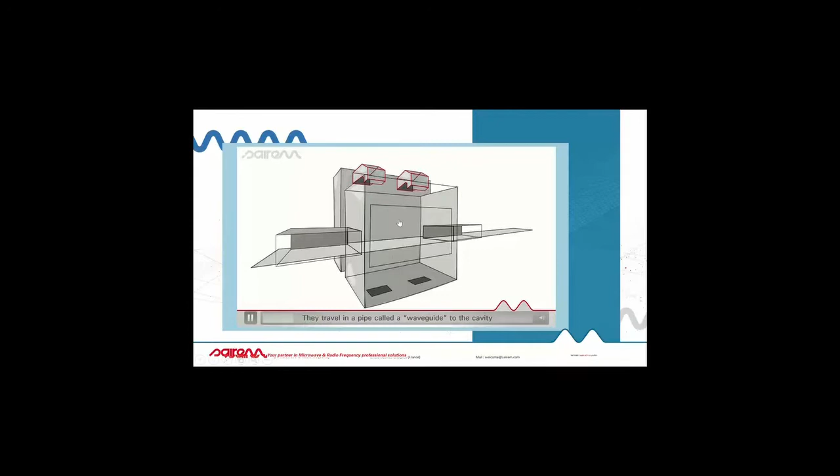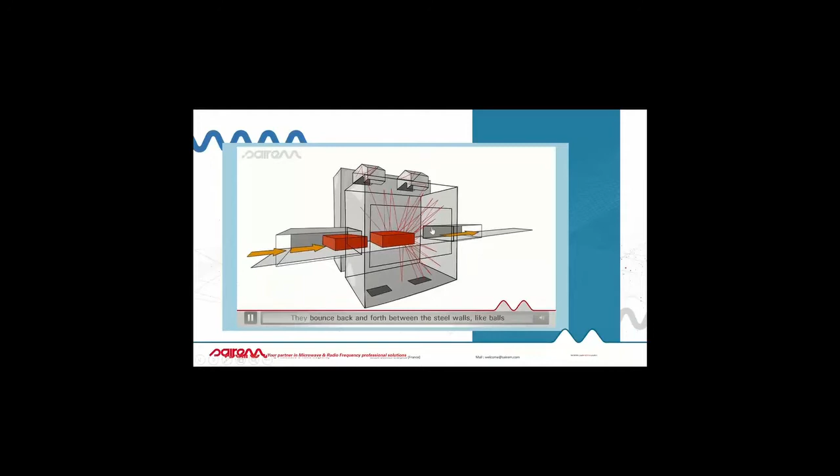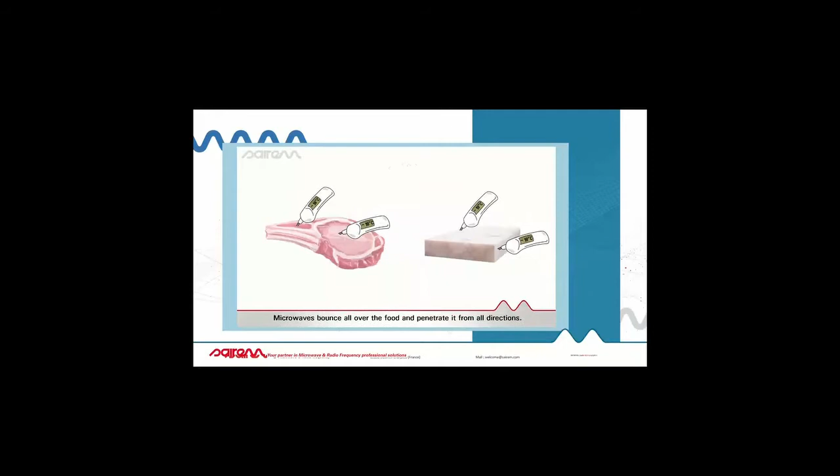The objective is to put the products on a continuous belt. For batch machines it can also be a manual system, and the microwaves will be coming from the top and from the bottom, so there's a distribution into the product from everywhere. The tempering time is very quick - the shortest on the market, between 3 and 10 minutes, according to the product, the final temperature looked for, and also according to fat percentage for meat products. So basically, it's adapted to any kind of frozen products.

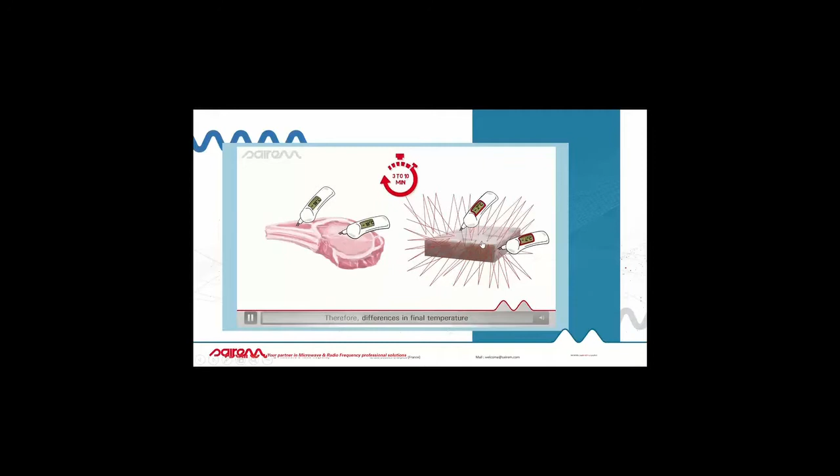On the right-hand side, you can see a regular block of MDM chicken. On the left-hand side, you can see a meat block. You can use any kind of product for meat, and the tempering time will be maximum 10 minutes.

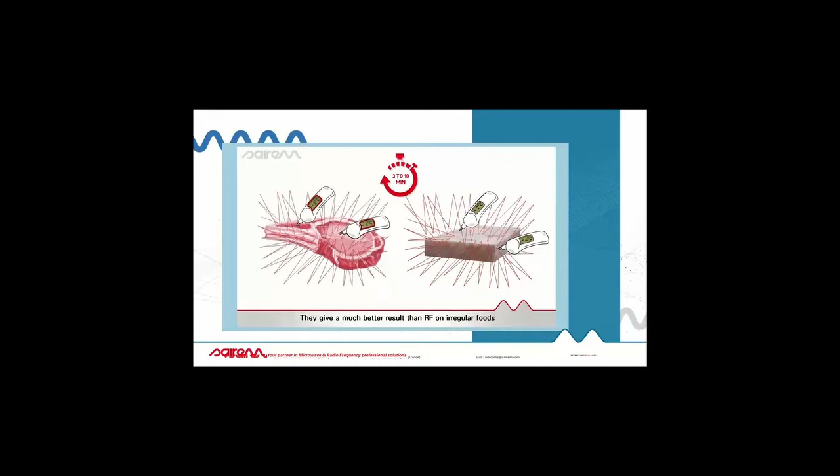The final temperature will be between -4 and -2 degrees. For some products, there's also the possibility to be closer to 0 degrees. For example, for some meat blocks or chicken products, you can be between -3 and -1 degrees. For products like fruits and vegetables, you can even reach a final temperature between -2 and 0 degrees.

For fish products, like seafood products, IQF products, it's more or less -4 degrees. And for butter, butter is the only product which can reach a positive temperature with microwave technology, and it will be about +5 degrees within a maximum of 10 minutes.

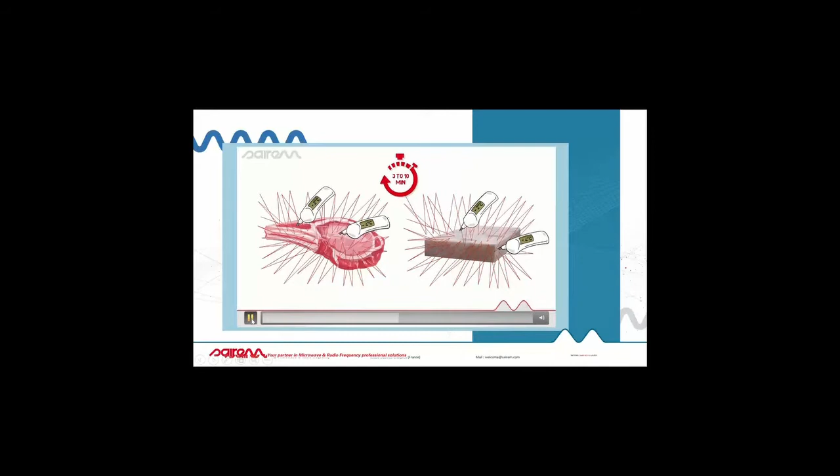Then if we continue the video, we'll see the radio frequency technology. The first thing I wanted to tell you before I show you the video is that SAIREM is the only company in the world able to offer both microwave technology and radio frequency technology. Some companies in the market only produce microwave equipment, and some others only produce radio frequency equipment. We can offer either of these two technologies.

We choose the technology according to what the customer wants to do. We have the best experience and know-how to recommend the right technology. Today, to be honest with you, the radio frequency technology has the biggest benefits for non-tempering applications.

For example, it's a very big market in the textile industry. For drying, it's also a very good technology. For tempering, it will have an advantage only if we are talking about fish products, and mainly for products which have a very regular shape, which is the case for fish blocks.

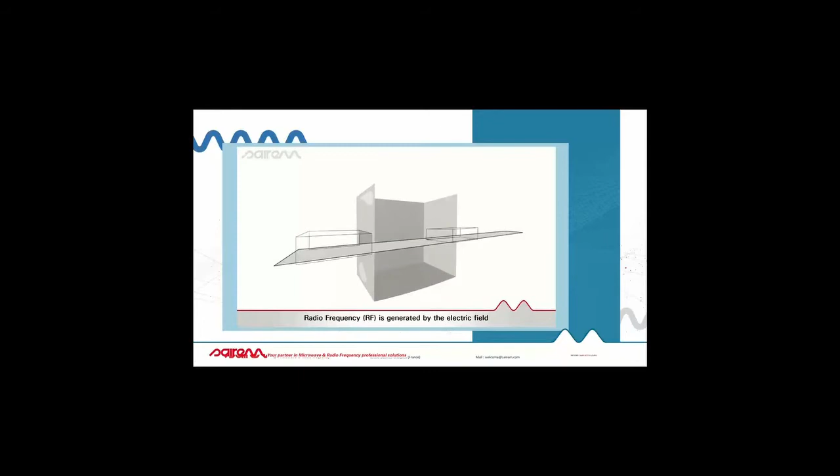In the video, the principle of radio frequency technology is very similar to microwave technology. You still have a cavity, still have the conveyor belt in which the products are running, but inside the cavity we have 2 plates that we call electrodes, one on the top and one on the bottom.

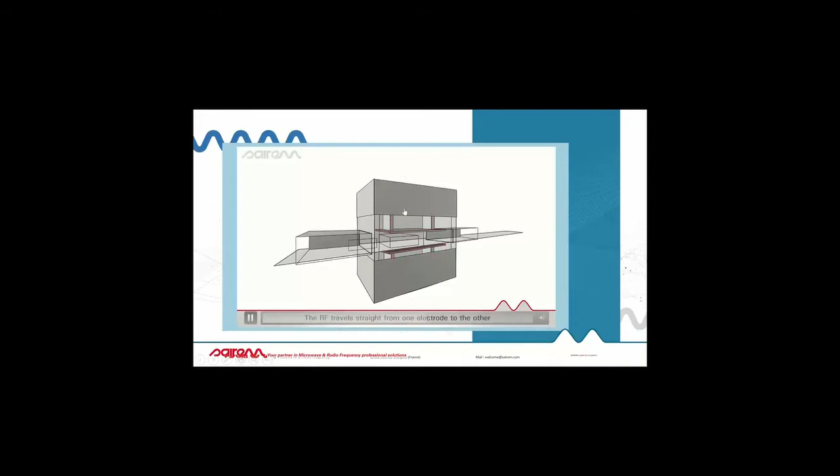With the electrodes, the power comes from the top, and it works very well if the products are very regular. This is the reason why for standard fish blocks it's excellent. The tempering time is longer than microwave technology—about 20 to 40 minutes, so about 5 to 6 times longer—but still compared to traditional systems, it's much faster.

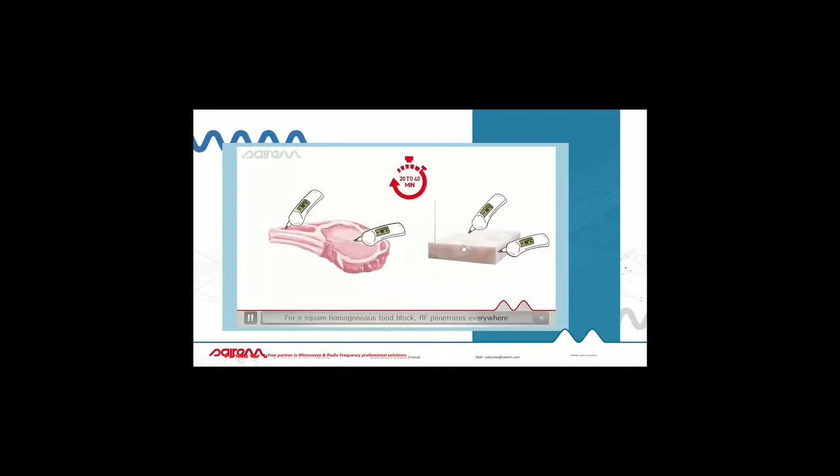So it's working very well for the products on the right. For this regular block, like a fish block, it's excellent—you can reach a final temperature between -3 and -1.

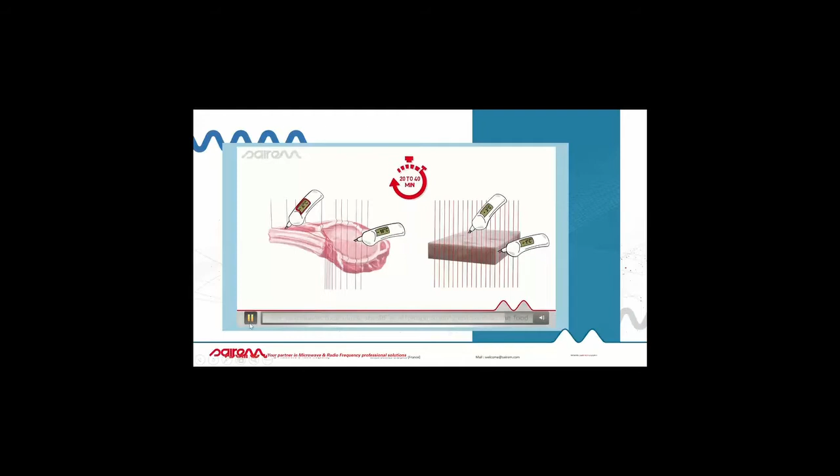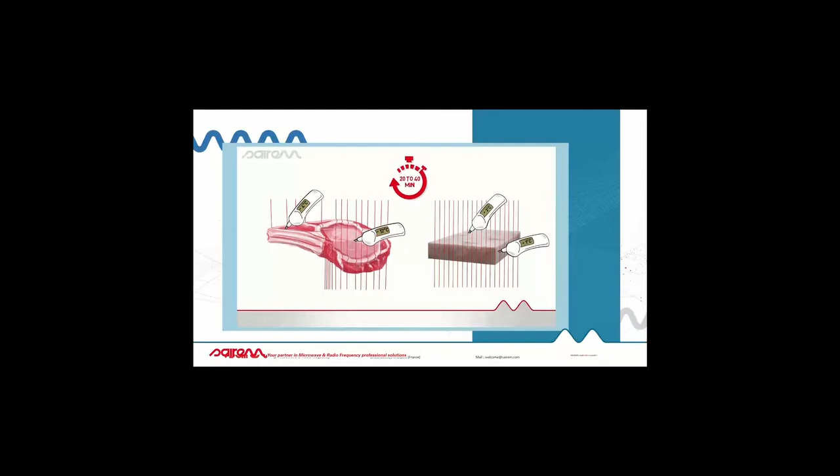However, if you are using a meat block, which is not regular, and you use the same time as for the microwave, then we'll have temperature differences. To be more homogeneous, we need to add more time. This is the reason why it takes about 20 to 40 minutes for a complete, good tempering result.

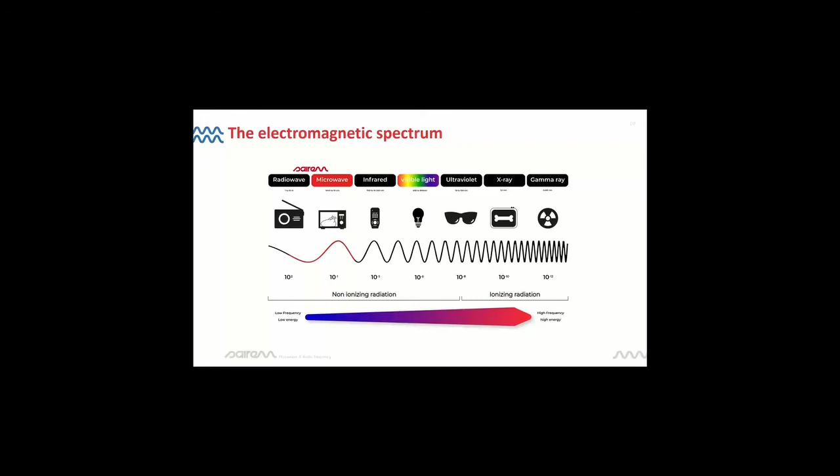It's a heat treatment, so it's not ionizing. This means that you don't need any certification or to fulfill any requirements to be allowed to use a microwave machine or radio frequency machine.

Here on this slide, we can see the different frequencies that can be used. For radio frequency, the main frequency used for tempering will be 13.56 megahertz or 27.12 megahertz. For microwave technology, in the food industry, we have the 915 megahertz frequency and 2450 megahertz. The 5800 is used, but not for food, it's used for chemistry.

So if we focus on the microwave technology, probably most of you are using a microwave oven at home, if you want to reheat a product or quickly defrost a ready meal. In your domestic oven, you are using the frequency 2450 megahertz.

For tempering, we are using the 915 megahertz frequency. An important thing to know is that the 2450 megahertz frequency is the frequency of the domestic oven, and it can't be used for tempering standard meat blocks.

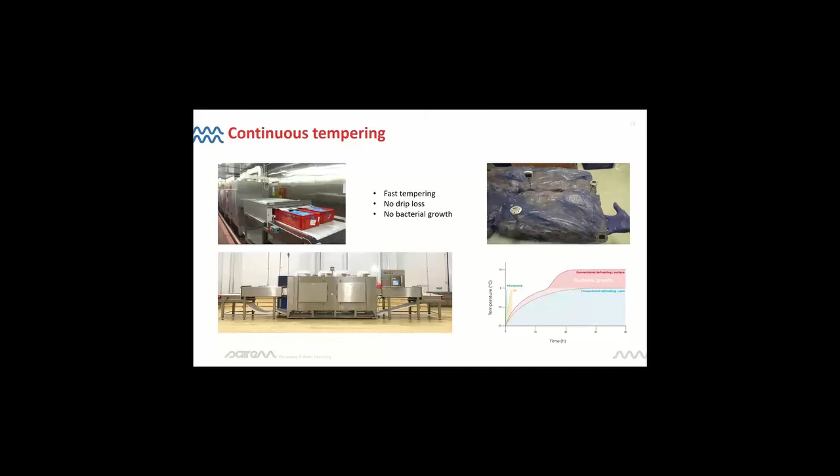Like the batch, it's still fast, taking 3 to 10 minutes. There is no drip loss—we'll see later on why—and there's also no risk of bacteria.

So we have 5 different models. The TMW35 is the smallest model, the most compact continuous tempering machine. Basically, this machine is excellent if you need to temper, let's say, between 1 ton and 1.5 tons of meat products from -18 to -4 degrees.

It's a new machine that we added to the range something like 5 years ago. The reason we added it is because we have a lot of customers in Asia who don't have a lot of space. They were looking for a continuous solution that is as compact as possible, and the TMW35 meets all these requirements and is the most successful machine that we have. Usually we sell between 6 and 10 machines each year for this model.

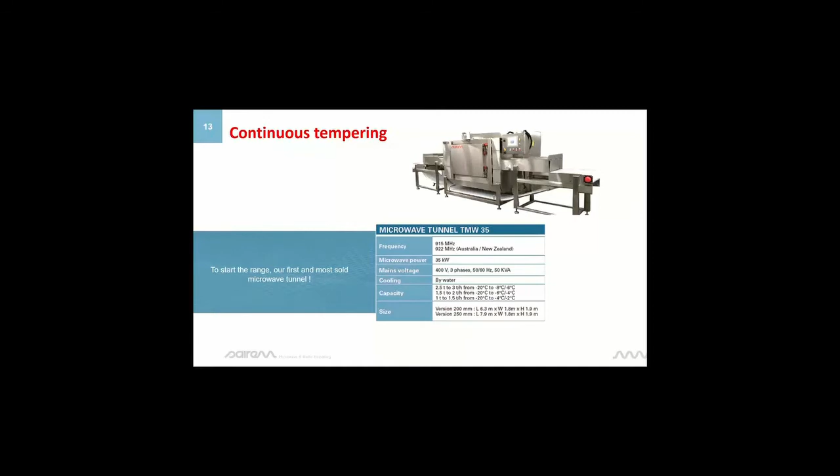Then we have different continuous machines. Unlike the TMW35, they have different sizes. First of all, on the belt width, we can put 2 blocks on the machine, on width.

The generator must be located outside because it's a 75 kilowatt generator, so it's very efficient, and we need to put it close to the machine, but not inside. And the cavity also is a bit longer.

So basically, the TMW75 is perfect if you need to temper between 2 and 3 tons of meat products per hour. It's with 1 generator and 1 cavity.

Then we have the TMW150, which has 2 cavities and 2 generators. So actually, the capacity is 2 times bigger compared to the TMW75. So we can go up from 4 to 6 tons per hour for a final temperature between -4 and -2 degrees.

And then we also have some bigger lines, the TMW225 with 3 cavities and 3 generators. And then the biggest one, the TMW300, with 4 cavities and 4 generators.

So something which is important, starting from the TMW75, the machines are modular. So it means that, for example, if you buy a TMW75 because you just need to temper 2 tons per hour, and then let's imagine that in the future, maybe in 1 or 2 years, you need to double the capacity, you can upgrade the TMW75 to get a TMW150 without having to buy a TMW150. Basically, on the TMW75, we can add a second generator, a second cavity, and additional accessories, so that you can increase the capacity to get a TMW150.

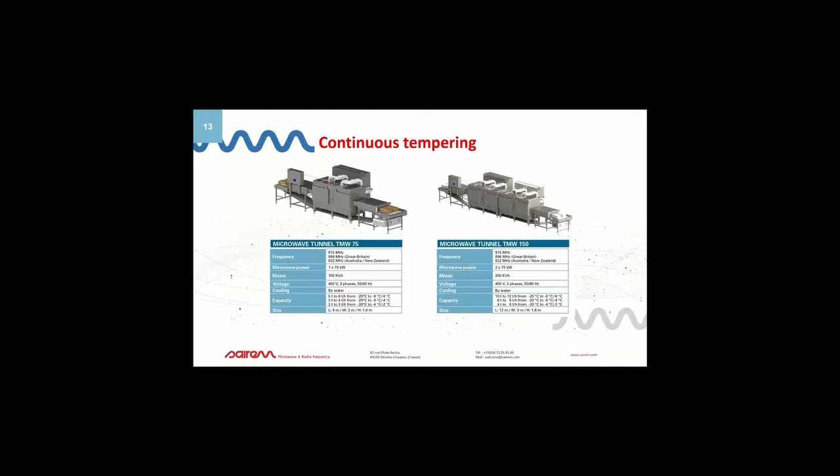So it's the same thing if you need to go to a TMW225 or a TMW300.

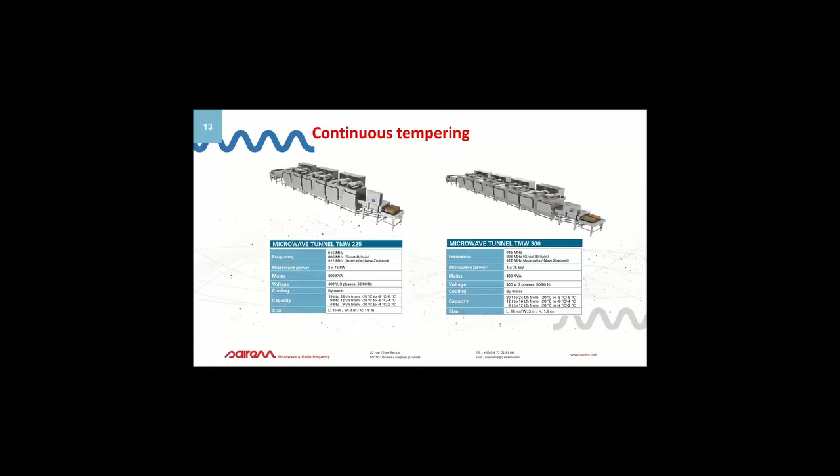So now I will talk about the quality, because I saw the presentation before, the question that was asked, and I could see that most of you guys are using traditional systems. It can be a defrosting room, it can be a steam room, it can be products also in a water bath. So basically, the microwave technology will bring a lot of benefits, a lot of advantages compared to some systems that you are using at the moment.

The first important benefit is the time. Today, on the microwave tempering equipment, time is very quick. It's the fastest way to temper a product from -18 to -4, -2, it basically takes maximum 10 minutes. And 10 minutes is also in the, let's say, worst conditions.

If the product is sensitive with a lot of bones or fat, or if the requested final temperature must be close to 0. But if we talk about meat like beef, pork, or chicken from -18 to -4, and if the meat doesn't have a lot of fat, it can be 5 minutes. So it's extremely quick, yeah? Much quicker than systems that can take several hours or sometimes several days.

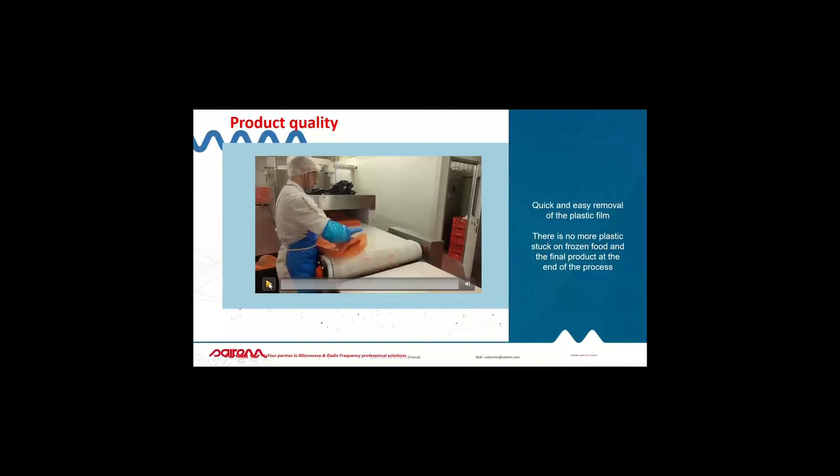We can watch this video. It's an MDM chicken product after tempering at -3 degrees. You can see how quick and how easy it is to remove the plastic film. So it's quick, it's easy, and you're sure that there's no plastic film inside.

For customers who are also using defrosting tumblers, when they need to inject or when they need to reach a positive temperature, there's also a strong advantage to use the microwave from -18 to -4. And then at -4, you remove the plastic film so that you can put the products into the tumbler without the plastic film.

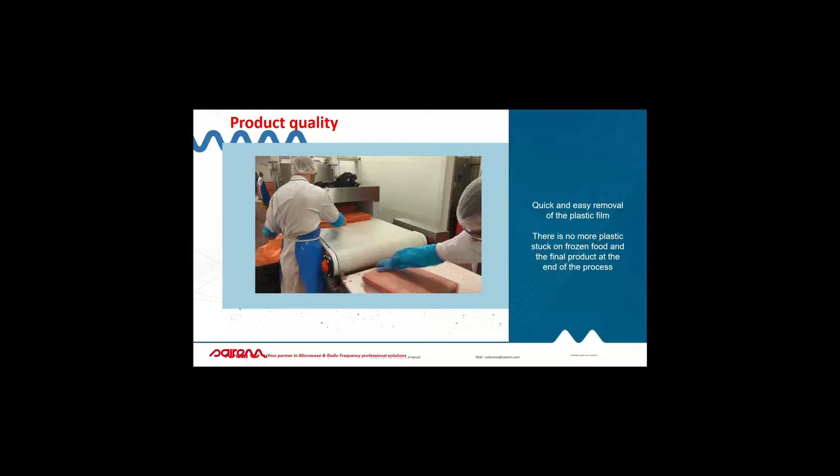Then some financial advantages, some savings actually for companies.

The first one is related to the drip loss process. Today, our customers using a microwave or radio frequency machine for fish don't have any drip losses. The weight of the product before tempering will be the same after tempering. Why? The answer is quite easy: the final temperature is still negative, so we're still below 0 degrees, so there's no oxidation, no change of state. You can be sure that the product after tempering for this application will not have any drip loss. So it means you can later put the blocks into a grinder or a dicing machine while keeping the exact same weight as before tempering. For companies, that's a really strong benefit because you can save a lot of money just because you don't lose any drip loss. Later on, I'll show you a quick payback calculation we made for one of our biggest customers.

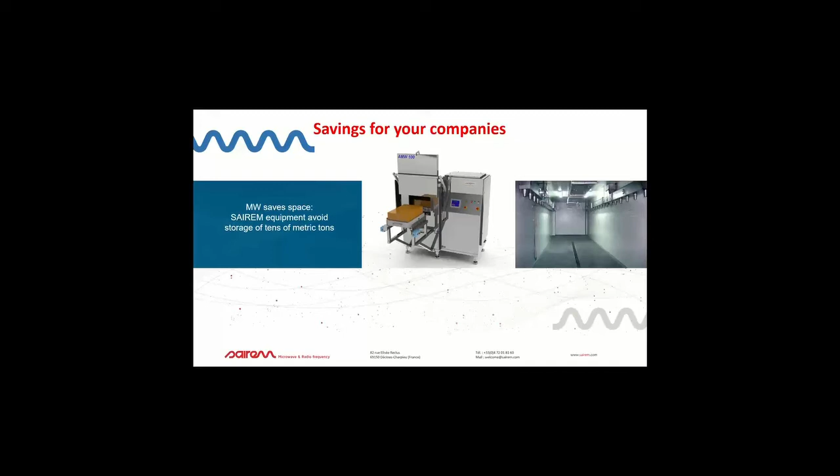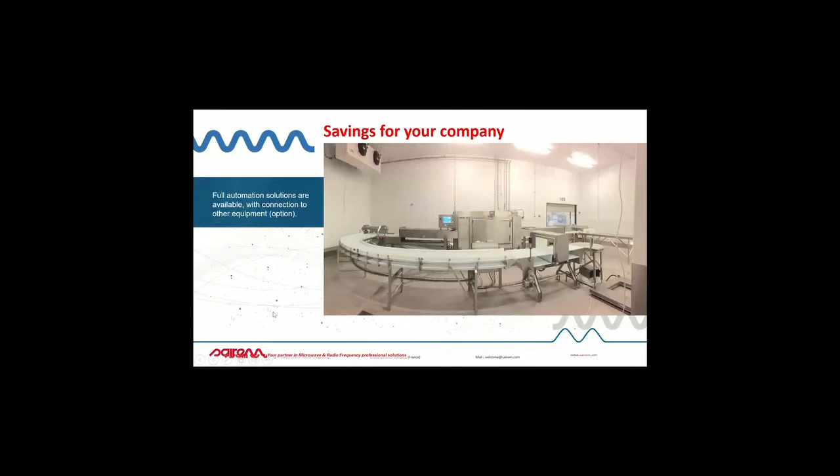There are also savings for companies when they have to use a lot of products. When you need to defrost product with traditional systems, you also need to put a lot of products, to have a lot of products in stock in your facilities. Today, with our system, you can be much quicker and much more flexible as well. So it can also be a way to reduce the quantity and number of frozen products you need to have on stock.

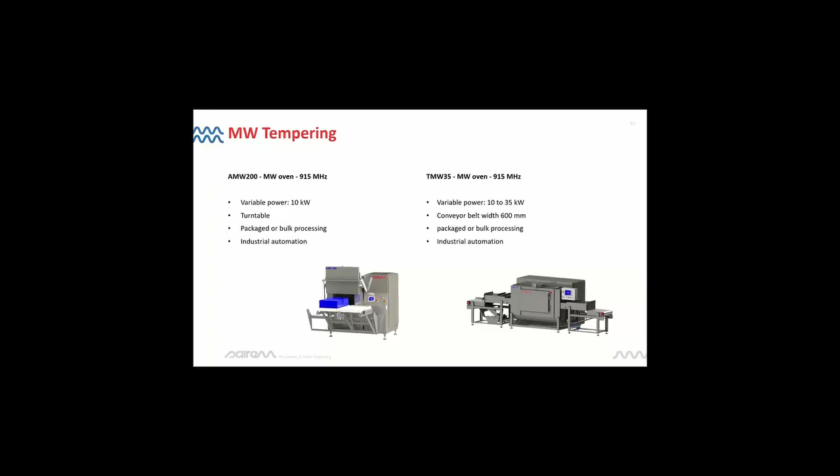From our side, we have a lot of customers who are interested in equipment, but they want to see also how the result is with our products. So there is the possibility to make tests anytime. It can be made on a batch machine or on continuous machines, directly in our company. We have a demo center also with freezers, so we can store the products at -18 degrees so that the test can be made in the right conditions. But our customers can also rent our machine if they want to make the test in their factories for a certain time, like a couple of days or a couple of weeks. So it's something we can offer in case you are interested and want to check how your product looks like after tempering. So I'm finished with the presentation.

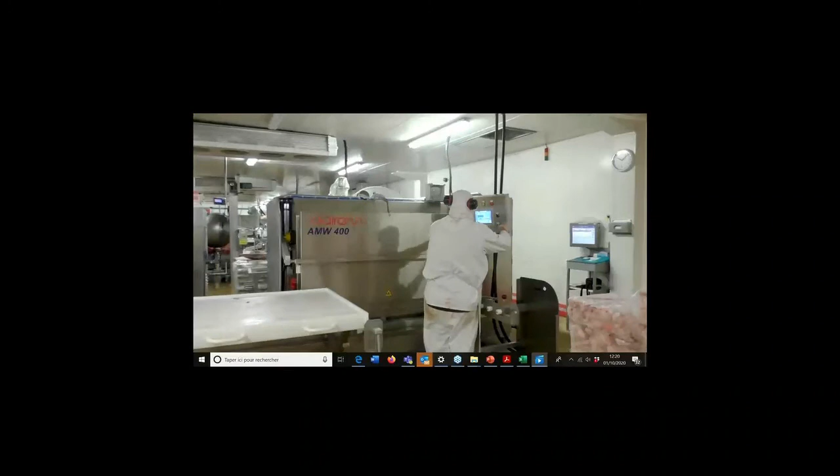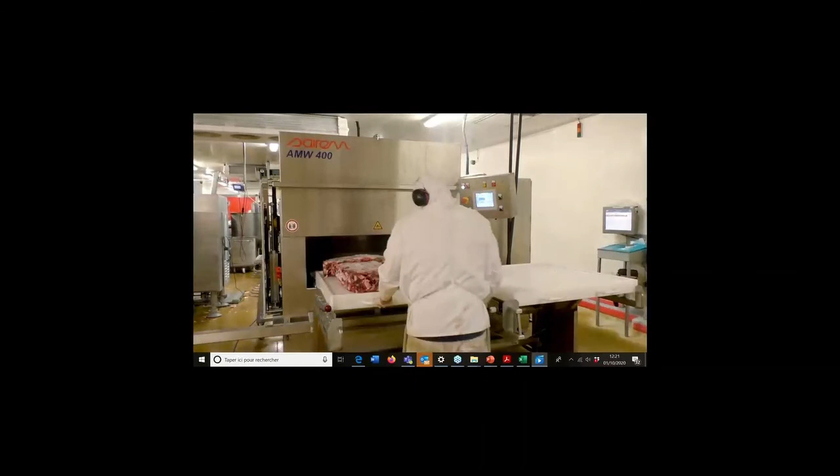Great, perfect. So it's a customer, a small size company in France. They are tempering many meat products like beef, lamb, and chicken, standard blocks of 25 kilos. The objective for them is to temper from -18 to about -4 degrees. After that, they put the products into a grinder. Here the system is easy: one operator opens and closes the door with a touchscreen on the right. Then you can see the blocks after tempering, about -4 degrees. There is no hot spot, no liquid, no drip loss, and they can directly continue the process they need.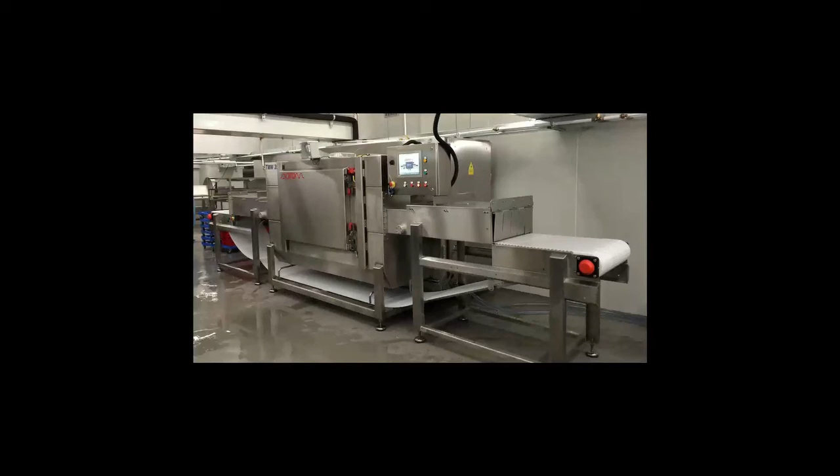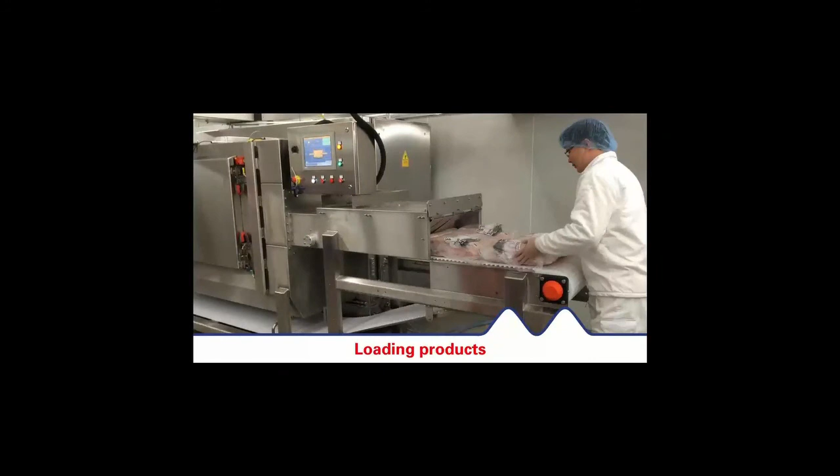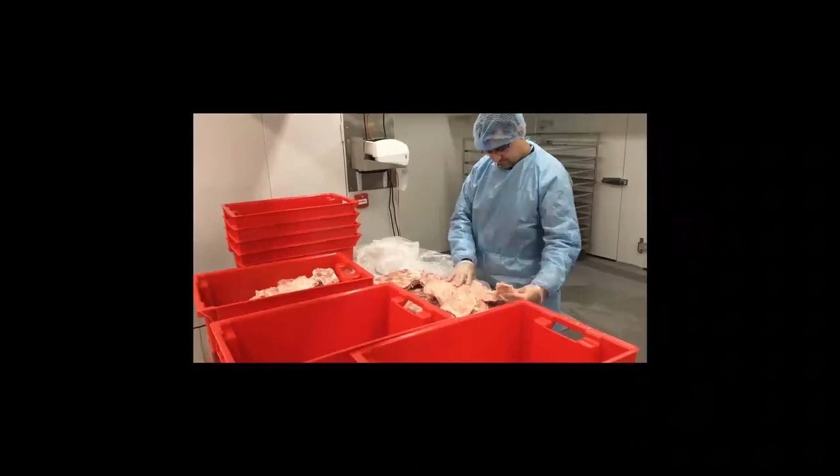This video shows the TMW35, the smallest continuous equipment. This machine was sold to a customer in Asia. They temper different kinds of meat products like beef and chicken, and you see they put different products and different packages - plastic film, with the crate - and it's working very well. The products are on the conveyor belt, and the speed of the conveyor can be increased or decreased depending on the results needed. After about 8 minutes maximum, you can already reach a temperature here between -1 and -2 degrees, and then you can easily separate the meat products.

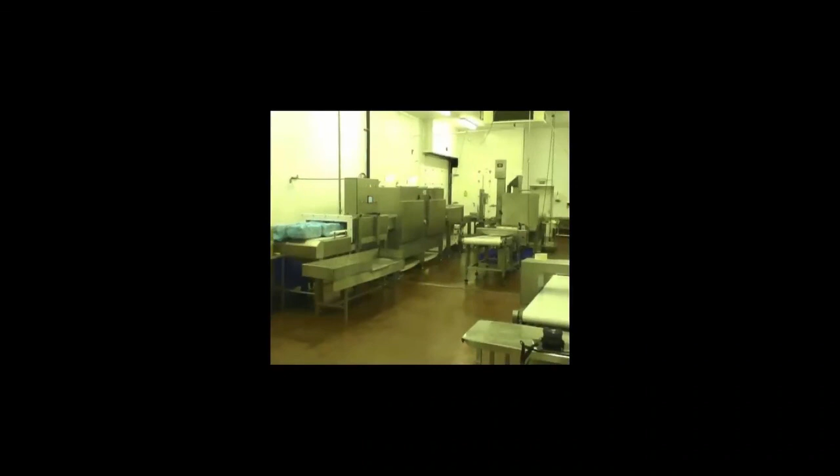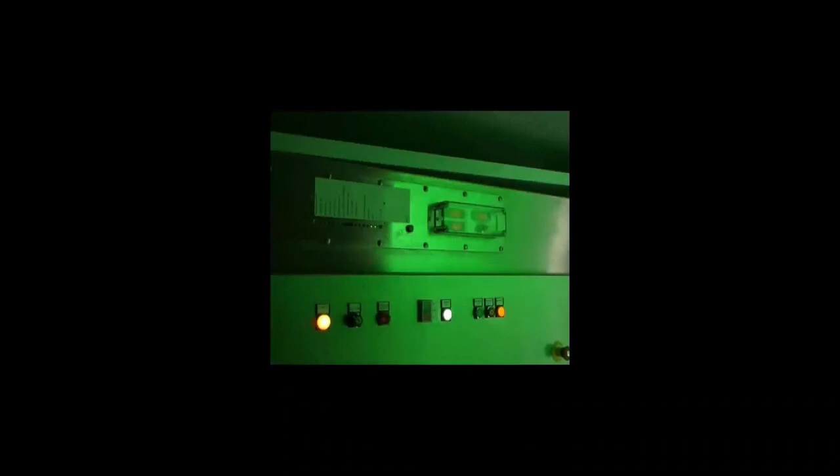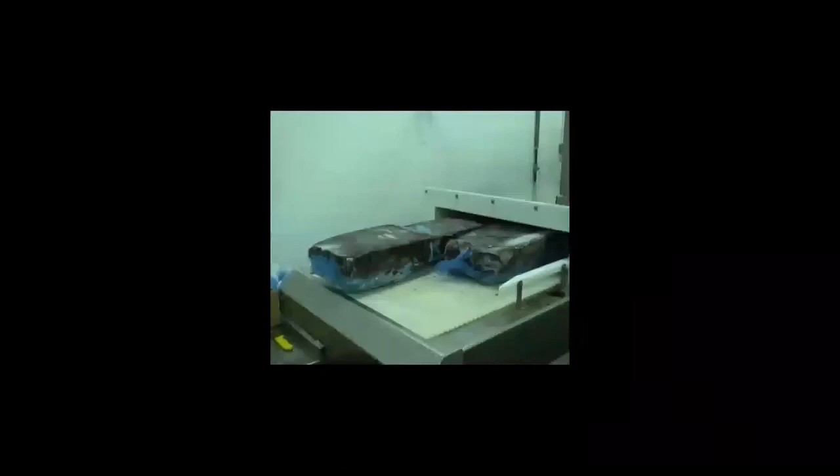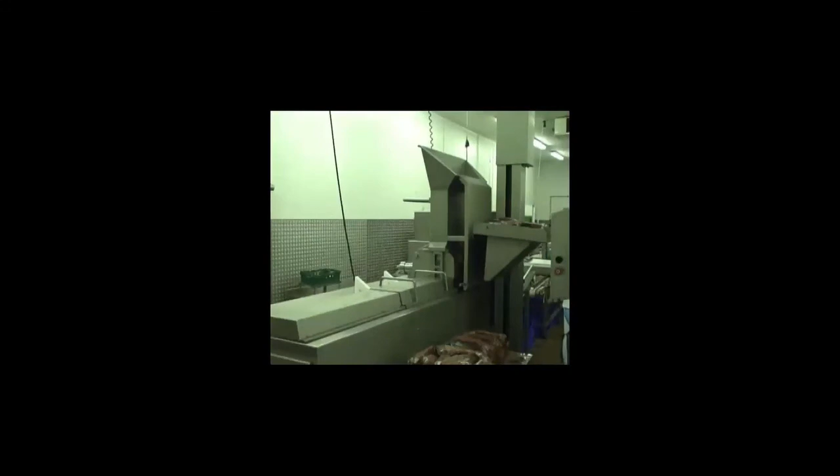We sold a machine in 2005 to a customer in England. It's a customer tempering beef and pork, also on the microwave technology. The objective for them is to be able to directly dice the meat block after tempering, without any waiting time, without leaving the product for a while in the room. So here they decide to remove the carton, just keeping the plastic film, which is fine and possible. Then we have the products after tempering - you can see how homogeneous the temperature is, between -3 and -2 degrees exactly. There is no liquid, no drip loss, no change of color, no hot spots. That's really a wonderful result. After that, you can directly put this meat block into the dicing equipment.

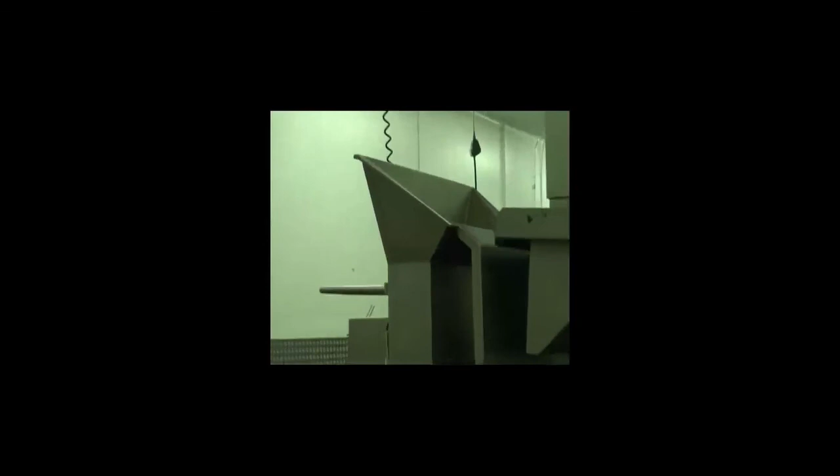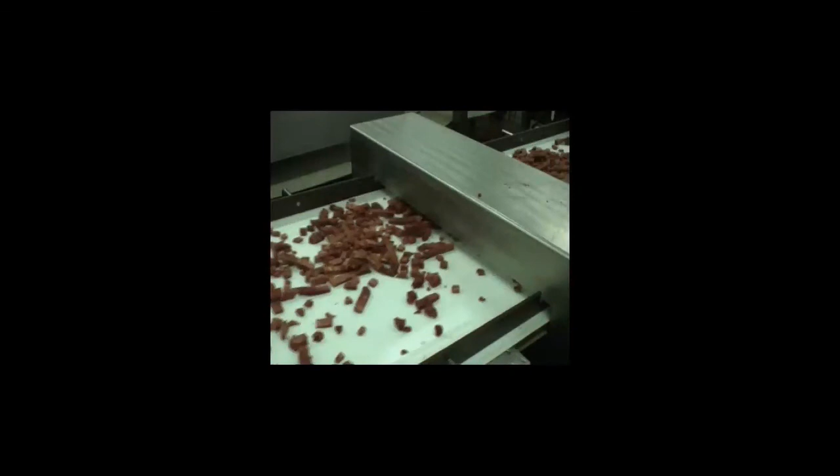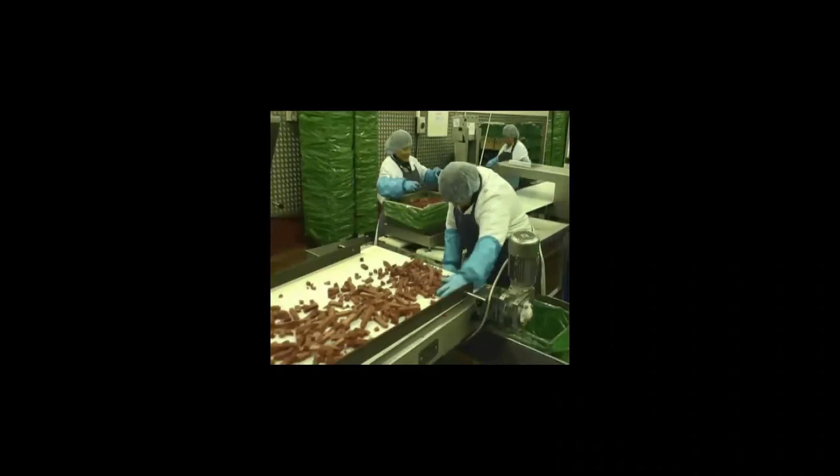In terms of flexibility, that's really the best, because this customer has been using the machine for 15 years and purchased a second machine 2 years ago. He could save a lot of time and also reduce the drip losses he had. So that was a very quick payback for him on the equipment.

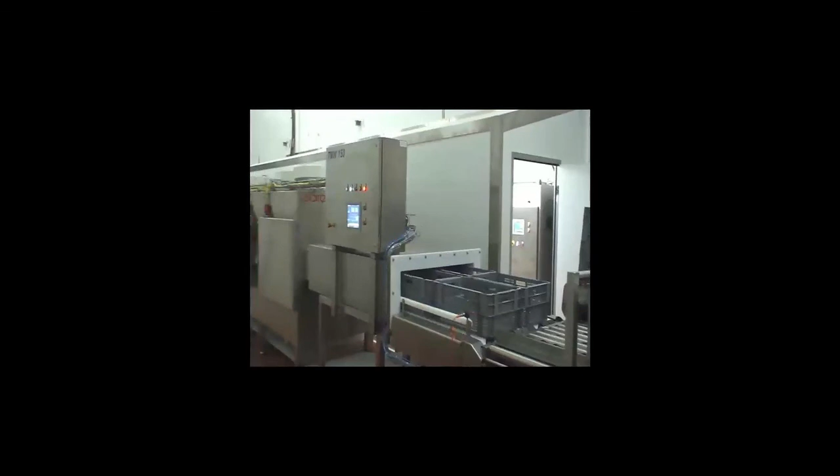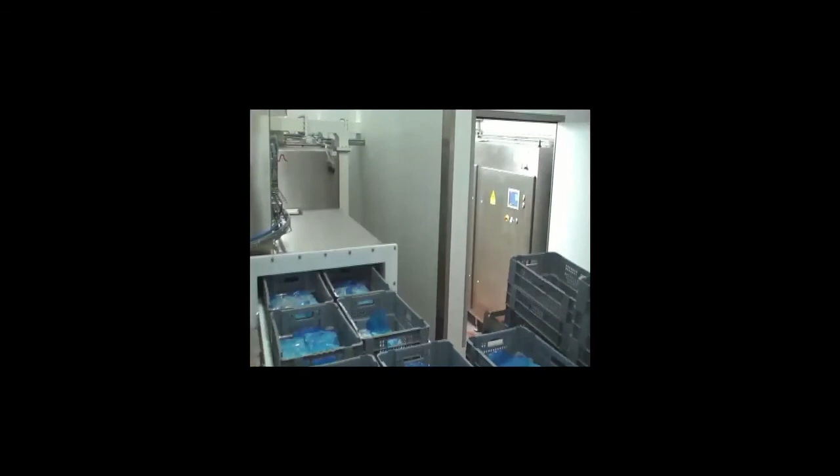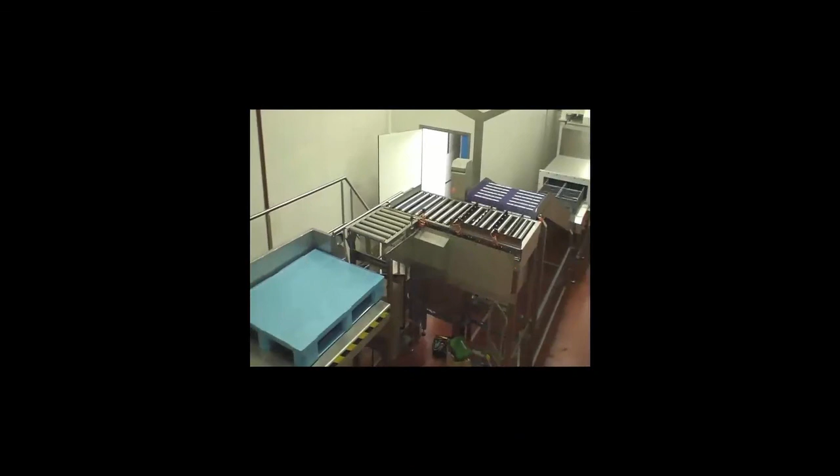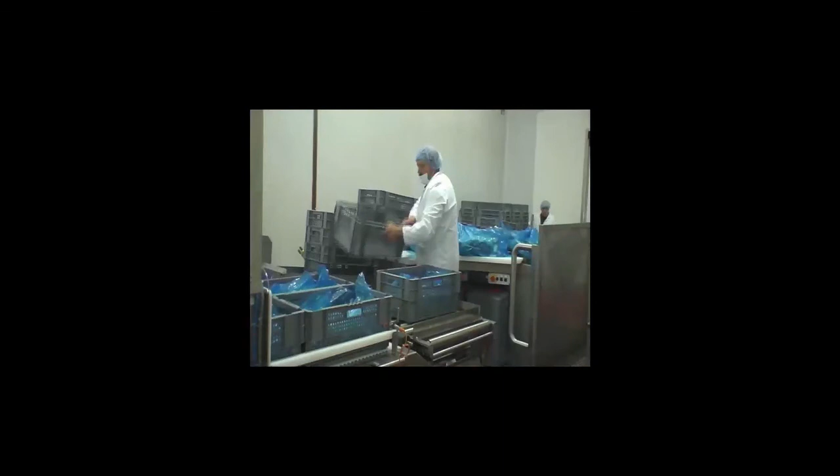Just the last one, to finish, I'll show you a big line as well - the TMW150. It's a continuous machine for 4 to 6 tons per hour, sold to a factory in France which belongs to Sigma, and they produce sausages. They use the equipment to temper pork blocks, 20 kilos, from -18, and for that process they need to reach about -2, -3 degrees. You can see they install conveyors before, to put the products into the crates. Here, this part is after tempering, also with some conveyors added by the customer. And here the operator just needs to put the meat products into the crate with the plastic film - of course, it's possible.

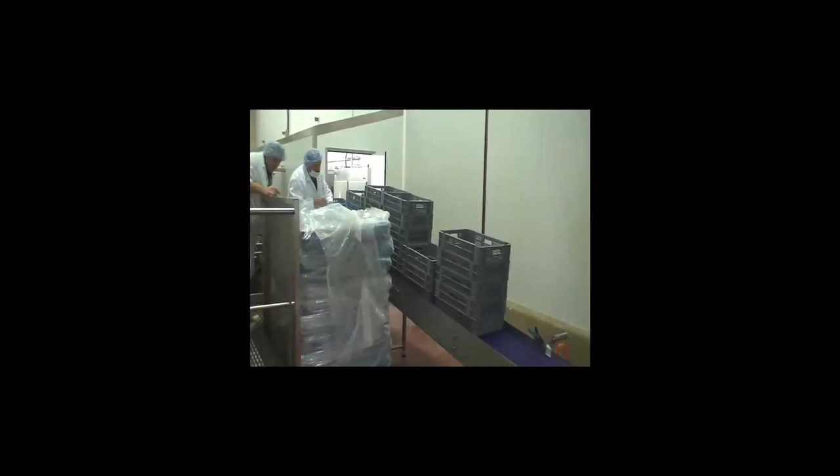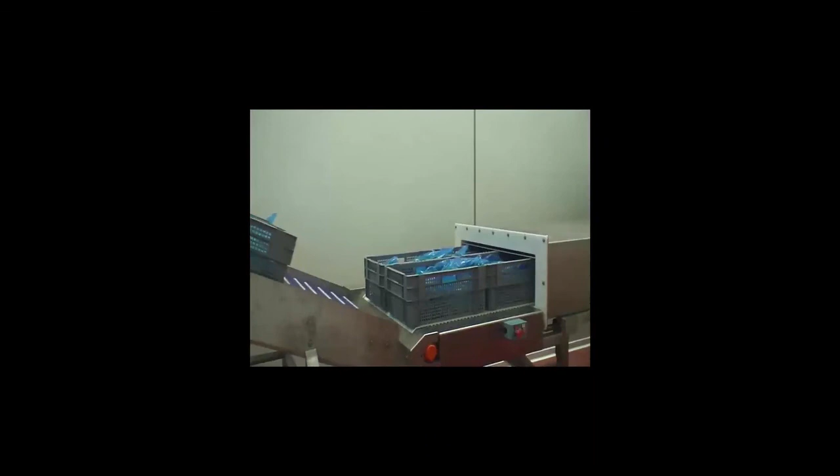Once they are in the machine, they can be tempered. The tempering time is about 6 to maximum 8 minutes, from -18 to about -2 degrees. The good thing here is that the product is not easy because you have a lot of fat—it's about 50% fat and 50% meat.

So it's working. The only thing we need to do is when you use a sensitive product, with a lot of fat or a lot of bones, we just need to adjust the parameters, the recipe, to reduce the power and increase a little bit the time in order to have the right homogeneity after tempering.

You were speaking about tempering, and yes—is it possible to go through the phase change with your system? Yeah, thank you, Jens, it's a very good question. So today we talk about tempering, you're right.

There is one product that we can defrost, totally defrost: butter. But first of all, I will explain why it's not possible, neither with the microwave technology nor with the radio frequency technology, to defrost. This is related to physics.